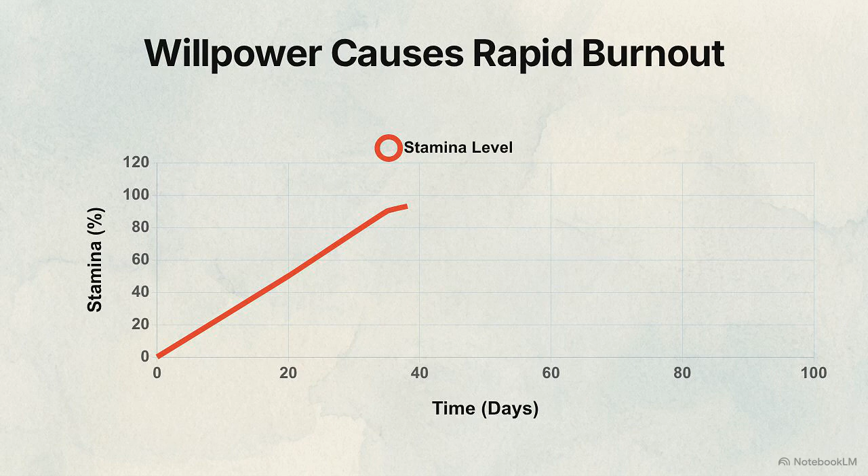Preparing for civil engineering exams is often treated like an endurance marathon, where the goal is simply to outread the competition. But treating your study plan as a test of stamina rather than a structured engineering project leads to exhaustion and failure. The real threat to your long-term study plan isn't the difficulty of the material itself. It is the daily friction of overthinking your schedule, which quickly snowballs into inconsistency. When a routine requires significant willpower to execute every single day, it eventually breaks down under the pressure of the workload.

Structuring this loop creates a predictable environment for your brain. This creates a mechanical advantage, ensuring that when you sit down to work, your energy is spent on solving equations rather than deciding which task to prioritize.

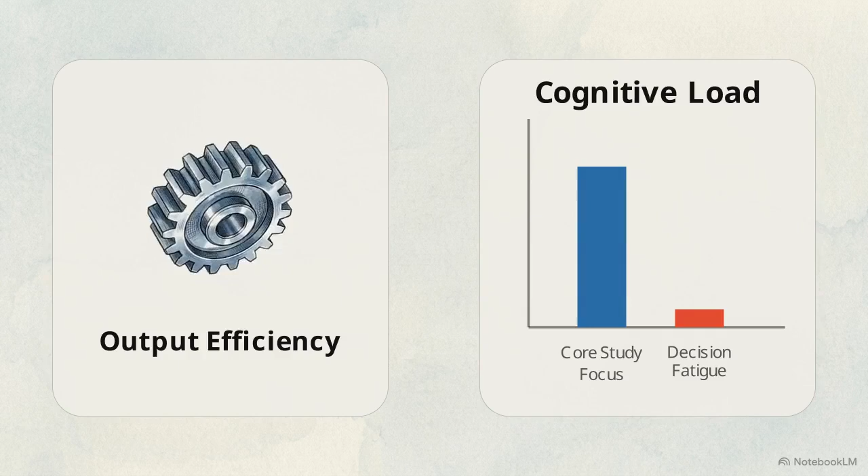Once your routine is locked in, you have to tackle the technical phase. But diving straight into heavy structural equations without building a mental model first is highly inefficient. You end up memorizing symbols instead of understanding mechanics.

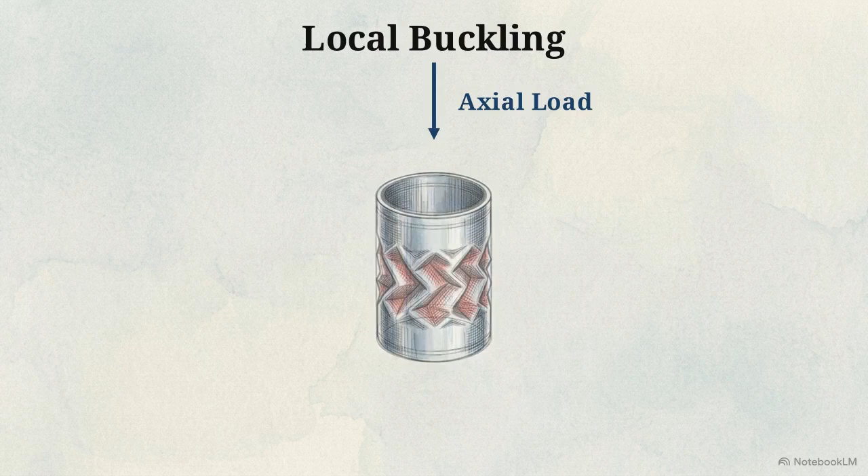Local buckling is like stepping on an empty aluminum can. Under vertical load, the thin wall crumples inward before the can bends. As these crimping zones highlight in red, the downward load vector remains constant. The material hasn't crushed, the hollow geometry simply failed.

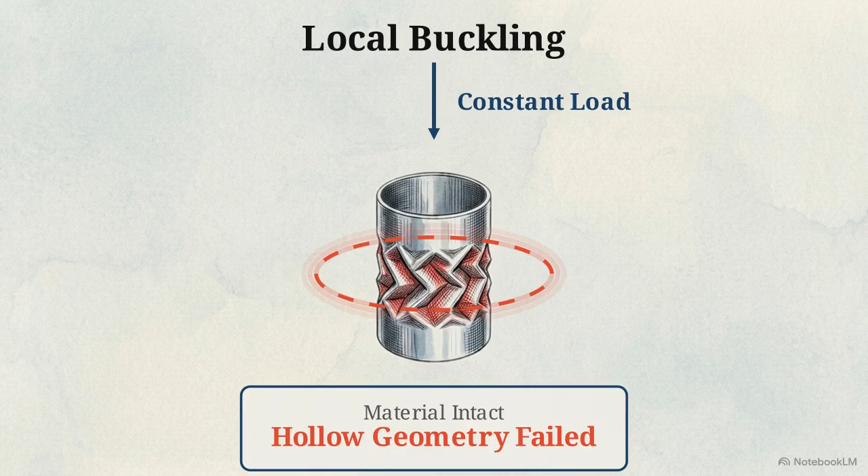This is why the order of your study workflow matters. You watch a short concept video to grasp the physical analogy, like the soda can, and only after that clicks do you open your textbook to read the mathematical derivation.

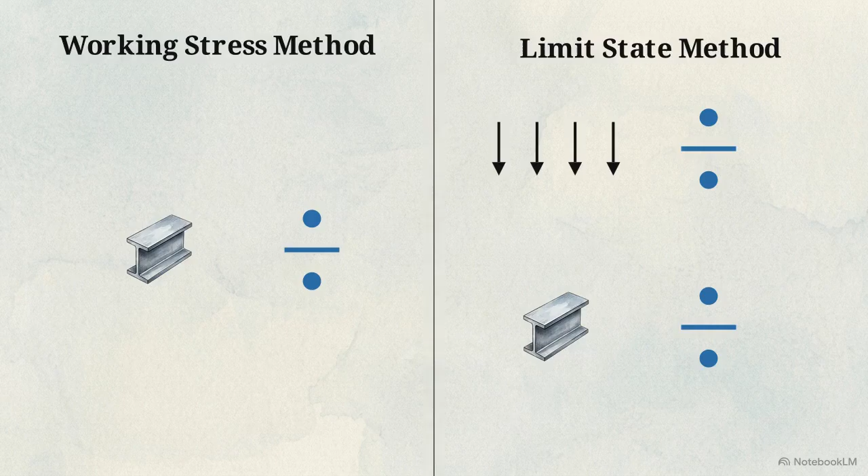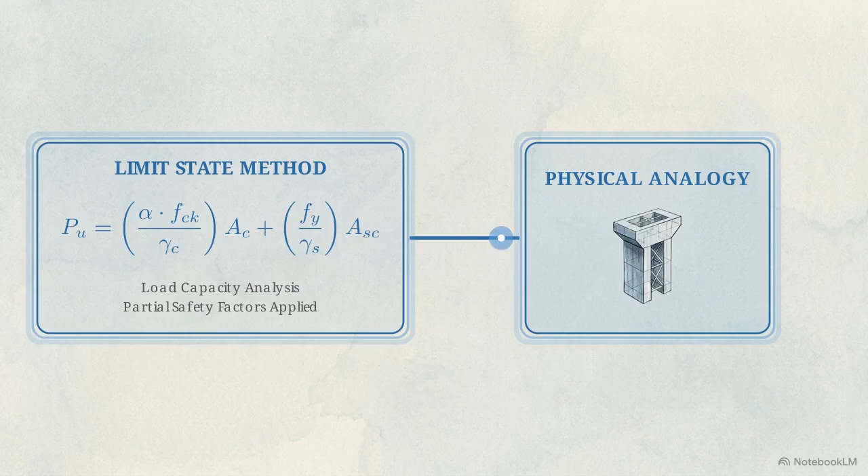This analogy-first approach becomes vital when you reach design philosophies like the working stress method and the limit state method. One relies on safety factors applied to material strength, while the other applies them to both loads and material limits. Without a mental map of how these safety factors are distributed, the conflicting numerical requirements in the codebooks become impossible to track. Anchoring dense structural math to a physical, real-world analogy ensures that your brain has a reliable backup retrieval system. When exam pressure spikes, you won't blank out on an equation because you remember how the structure actually behaves.

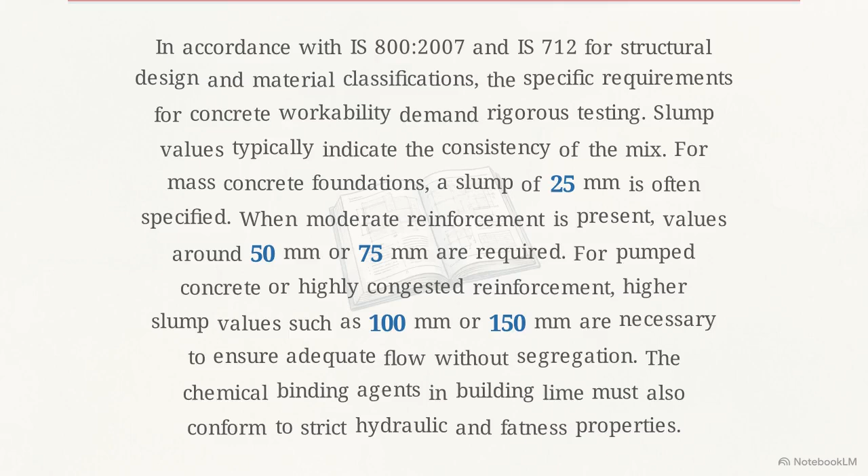Structural theory is only half the battle. The other major hurdle is the overwhelm caused by dense industry standards, particularly text-heavy documents like the IS 800-2007 Steel Code. The IS Code Triad framework scans dense text blocks, stripping away contextual noise to leave only a concise list of exam-relevant numerical values.

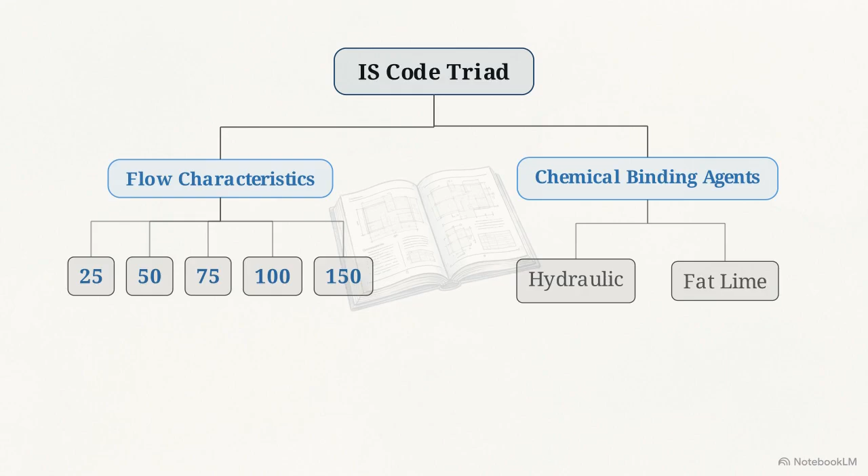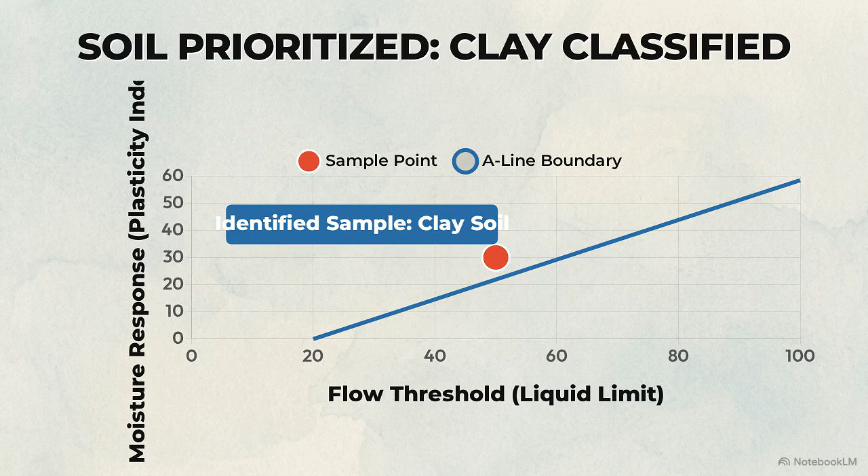Integrating targeted review loops and active recall aligns your preparation with the actual mechanics of the exam. This system prioritizes high-yield data over general reading, ensuring your effort translates directly into marks.

This single document consolidates everything we've covered into a 4-quadrant exam master cheat sheet. It maps your daily habit checklist, physical analogies, extracted IS code values, and active revision loop into one cohesive blueprint.

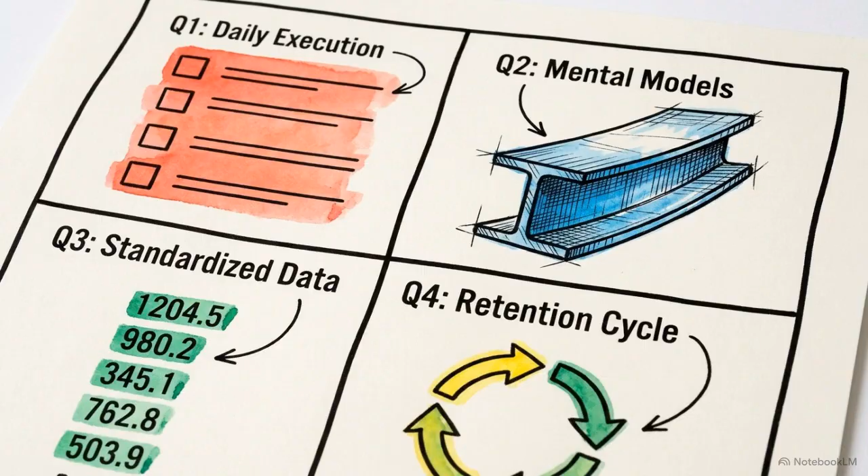Success in these exams is a product of technical strategy. It is built on maintaining a predictable routine and engaging in consistent, evidence-based self-testing.